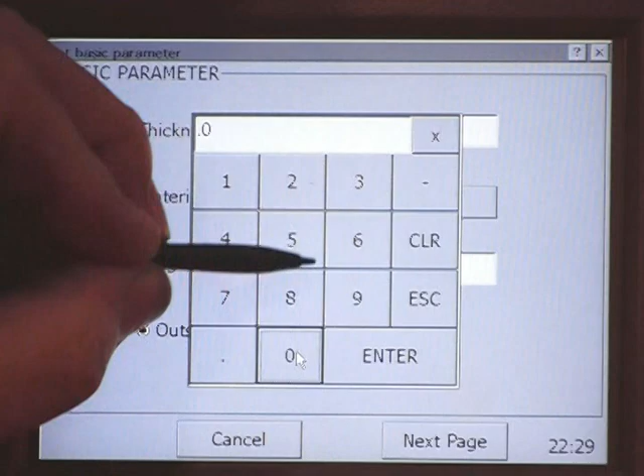Going to be ran. The thickness of the metal, we will punch in .06. Enter. Material type, we will go steel. You have your options of stainless, aluminum, and other, which we covered previous. We'll make it steel. The length of the metal is the amount that will be bent. In this case, 3 inches. So you simply put that in.

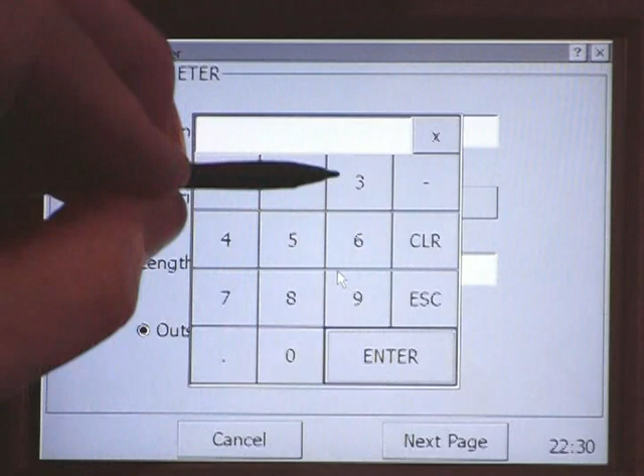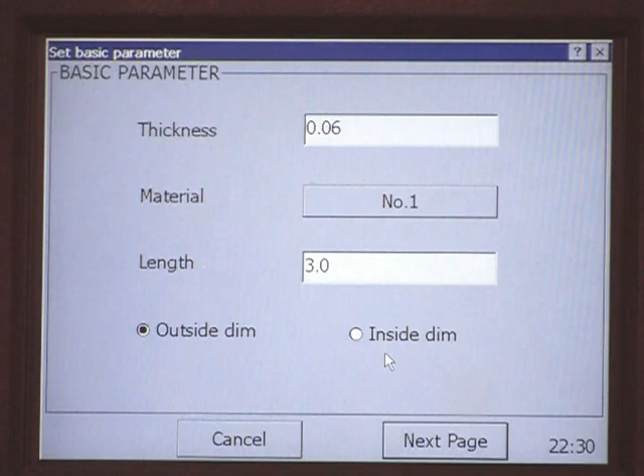Now, it shows outside dimension or inside dimension. That will be determined by your engineers or based on the drawing you're given. To make the product, it should say inside or outside. We will go with outside dimension. Once those have been determined, then you'll go to the next page. At this point, we're going to start our drawing.

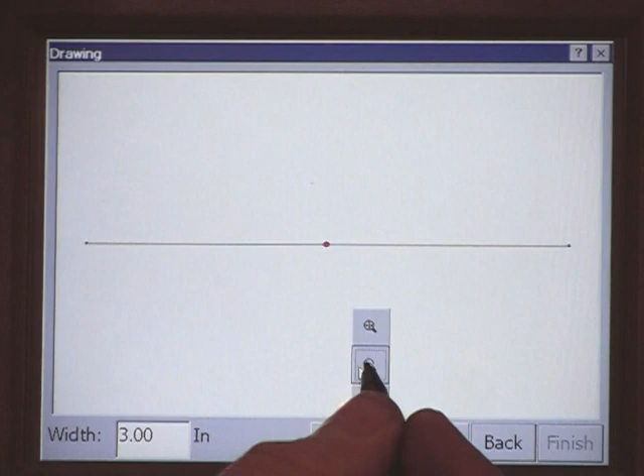The first thing it wants is a width. A width is your back gauge setting. This will be a linear drawing. So you will start from the left and go to the right. In this case, let's make it 3 inches. There's a zoom feature. You can zoom in. If you're doing small, you can go full page. Reduce. What you will do now is you will hit the right arrow.

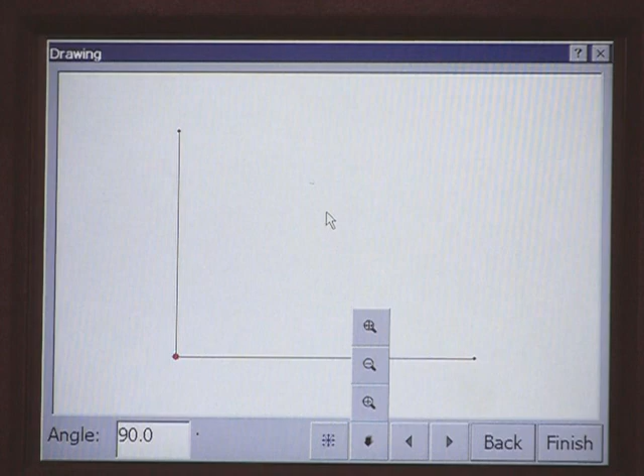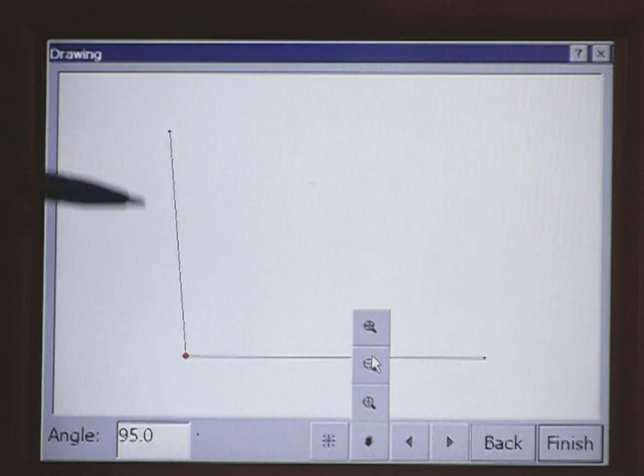At this point, it asks for an angle. If you are going to be doing an angle in increments of 45 degrees, you will select the box there and it will tell you you can select which direction you want it to go. In this case, I want it to go up. If it's not in an increment of 45 degrees, then you will simply put in what angle you want. If you want 95 degrees, you'll put in 95 degrees. And you'll see it's slightly less. What I'm going to do is make it 90 for this purpose.

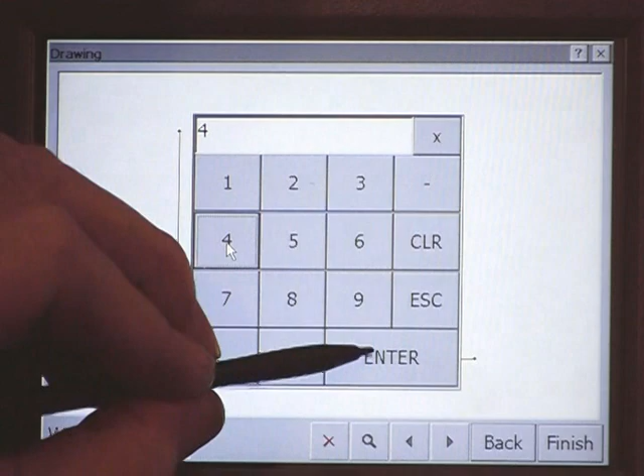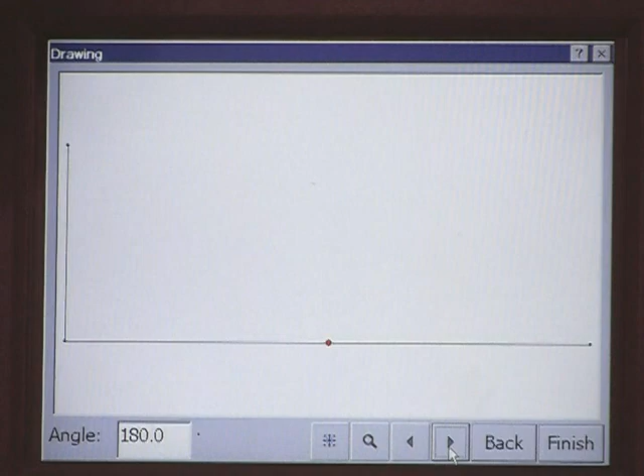You will hit the right arrow or next arrow. It asks for another length. I will put in 4 inches. Now follow the little red ball because that's where it shows the direction in which you're going. Then you'll hit the next arrow and it asks for an angle. I want a 135, or I want it to go down on a 45-degree angle from your baseline here, so I will select there. Now at this point, because the drawing is getting larger, I will decrease it a little.

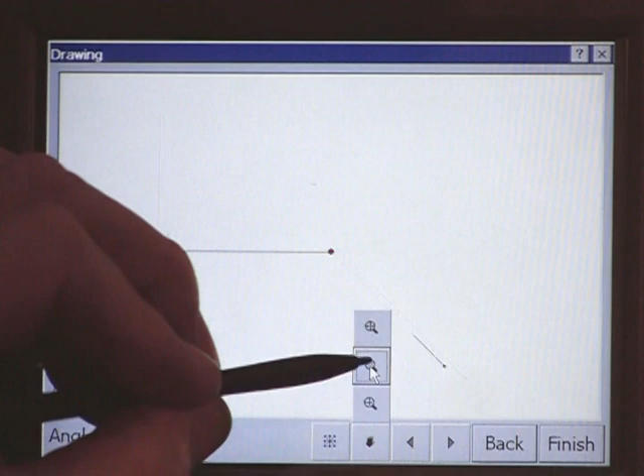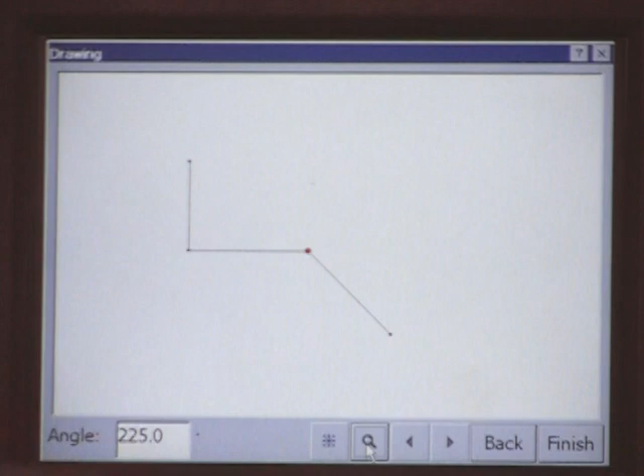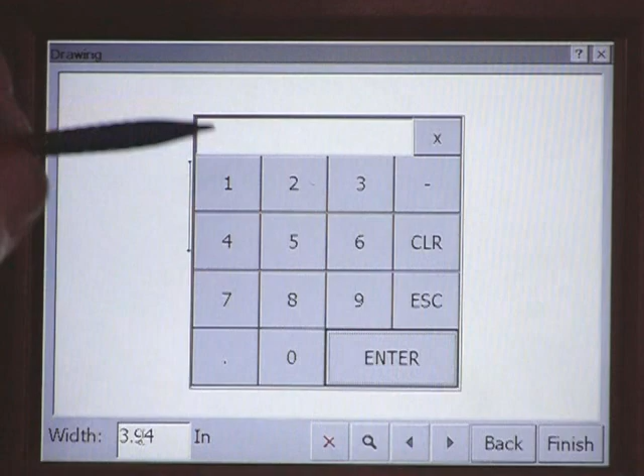Okay? Now, based on coming off of a 0 to 180 degrees, which is flat, this angle actually is 225 instead of 135 degrees. But as long as your drawing is reflecting the drawing that you have in your hand, that's what you're hunting for. You'll hit next. You'll put in the width again. We'll make this one 5 inches. Next, because I'm going to be taking it up, I'll select this arrow again. Okay, then you'll hit next.

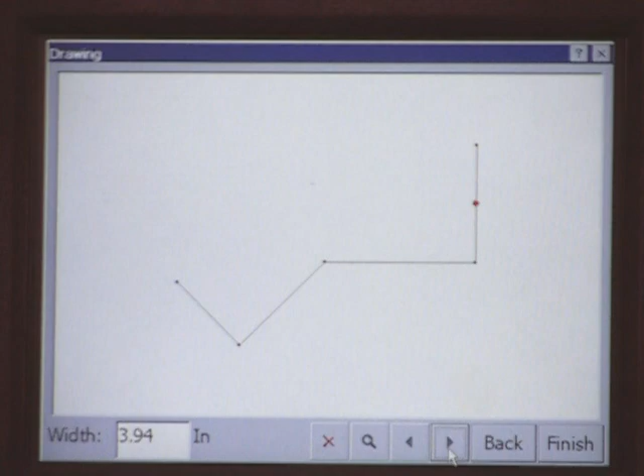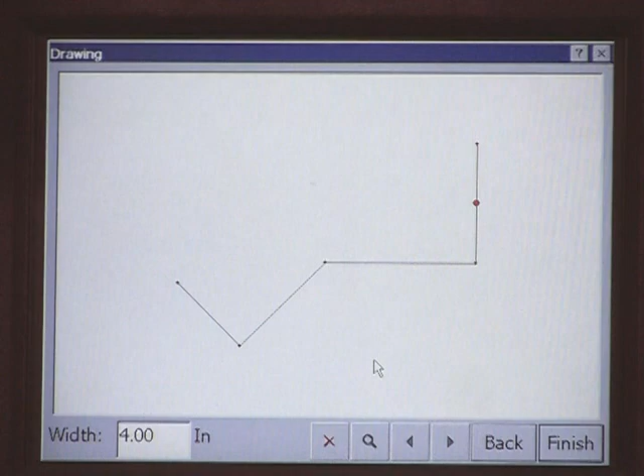The first thing that you will enter in a drawing is a measurement, and the last thing you'll put into a drawing is a measurement. At this point, I'll make the last one 4 inches. Once this is drawn and it looks exactly like the drawing you've been handed, you can hit finish. But I'd like to demonstrate other functions here, if I might.

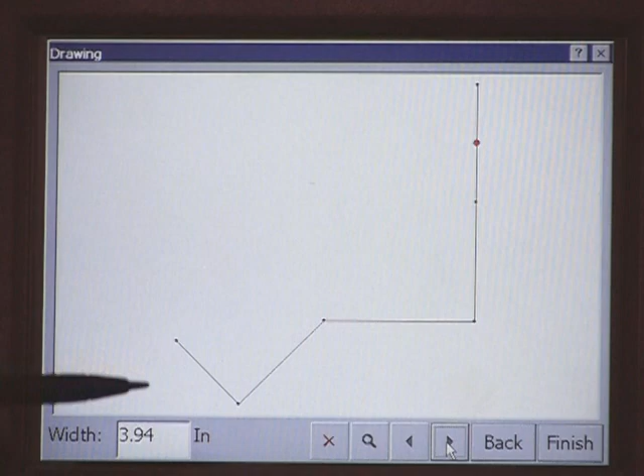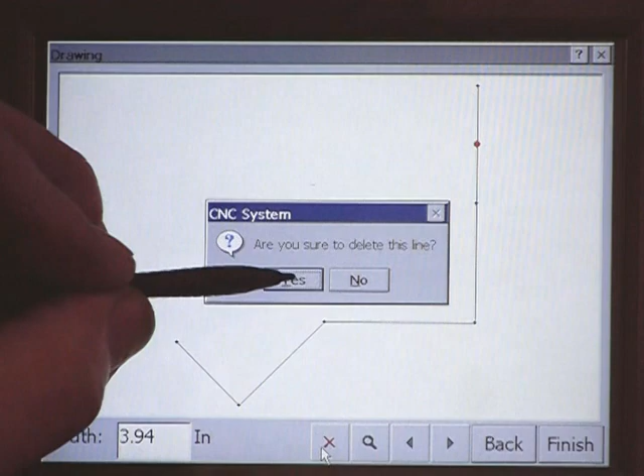Let's say that you go to this point and you've added another line. It's asking for an angle. Leave the angle where it's at. You'll go to next. Once it goes to width, you'll see a little red X. You'll touch that X and it asks, are you sure you want to delete this line? You'll say yes. You've deleted that line. At this point, you will hit finish.

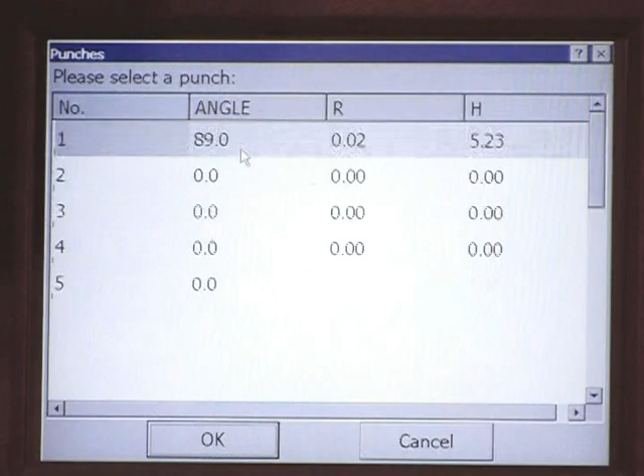And it's asking for further basic parameters. You will select your punch, highlight it in blue. You will select your die, highlight it in blue. Information A, C, E, and D, you'll see are whited out. Those areas are there so that you can change given information on whatever punch you're utilizing. The machine needs to know if your punch is different than what comes with the machine so that it can determine whether or not there will be an interference bend.

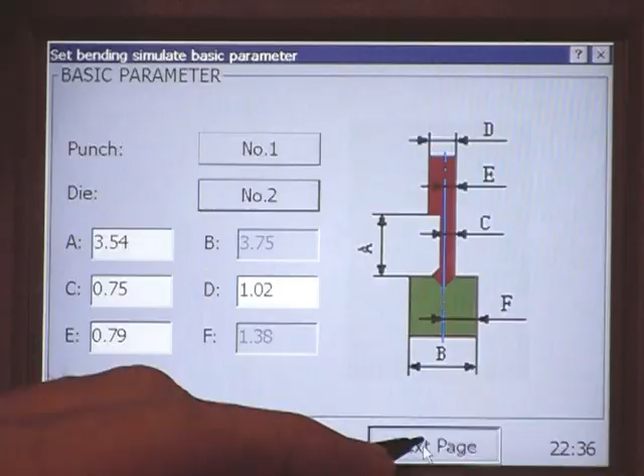So if you put a punch in other than what comes with the machine, these parameters should be measured and entered into the program at this time. These parameters are not asked for in your punch library. This is to augment your punch library for use of a punch only in the auto run mode. You will hit next page. At this point, we're going to simulate the bend. You will go through and you'll hit bend. There's step 2, bend, and step 3.

Now, go to your function keys, and what you can do at this point, let's go back to step 1. We're going to hit unbend, unbend. At this point, if you use the swap key, if you follow the little red ball where you started your drawing, when you hit swap, you'll notice the little red ball came out the other direction. The computer did a sort, and that's how it's decided it wants to bend this material for you in the shortest amount of time.

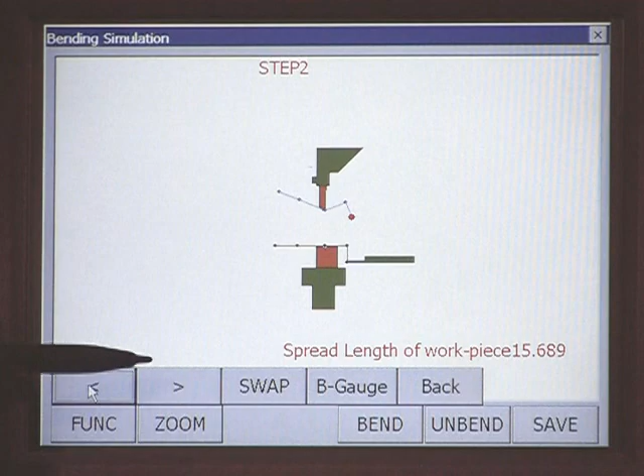Now, on the first and the last step, all you can do is swap those two. But any bends in between, let's go to step 2. The machine's showing a 90-degree bend. Let's say that you want the 135 bend first. What you will do is you will move the positioning around with your arrows. Now you'll notice that step 2 is actually 135 degrees.

Myself, I would rather stay with what the computer, in this case, has chosen, so I'm going to swap it back. That's what those keys are for. Now, I'm going to bend the next step. At this point, you will notice that your back gauges drop down to meet the tip.

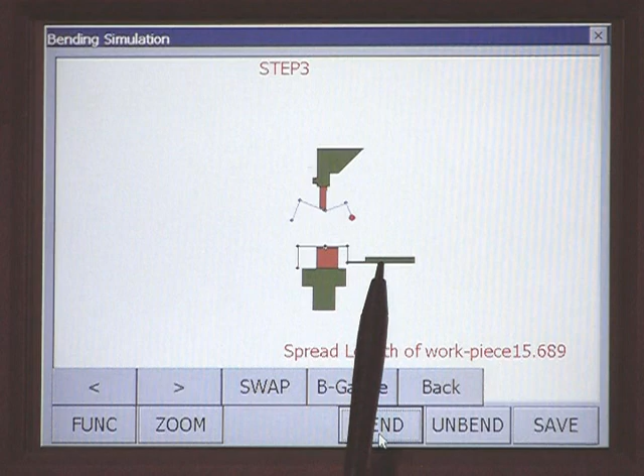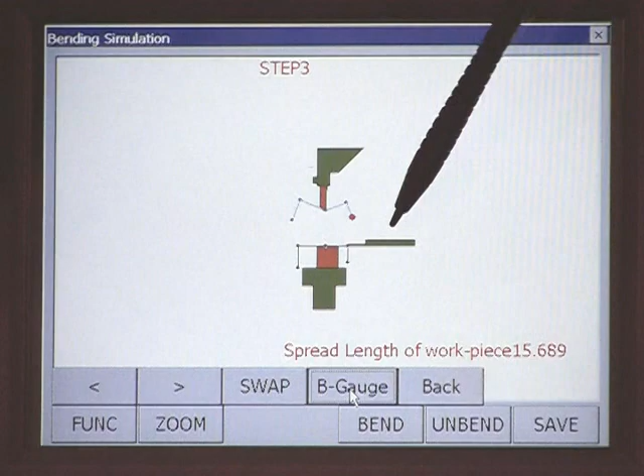On some machines that do not have the R-axis, this cannot be achieved. And also, your R-axis may not have enough travel to achieve the length which is needed to accommodate. So what you would do is touch back gauge, and you will notice now that the back gauges come up here. This will automatically activate the automatic retract feature in auto run.

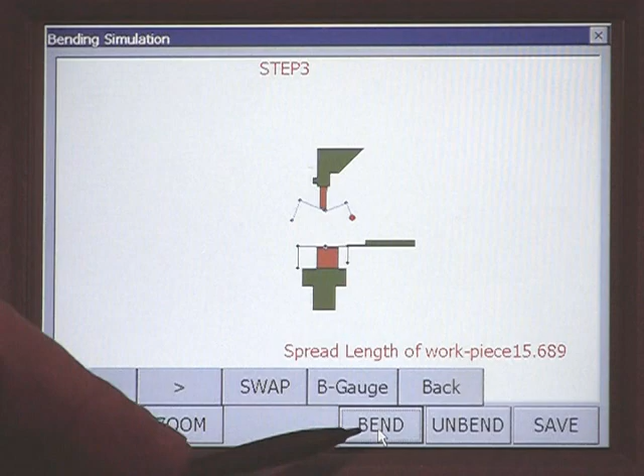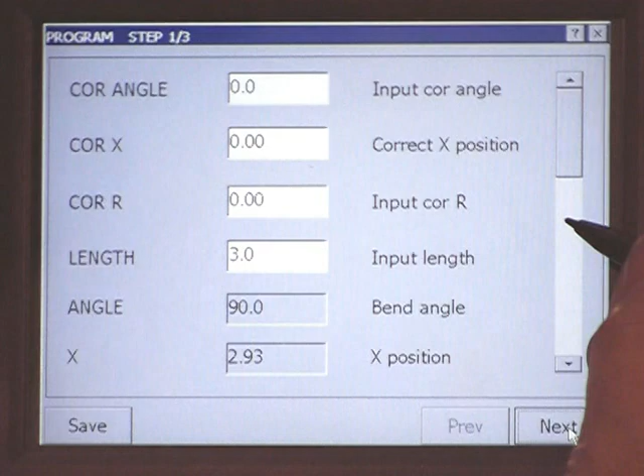At this point, once you've established this is exactly like you want it to bend, you will go back through. Ensure that everything is exactly like you want it. And then you will hit save. Now, it goes into a code program so that you can go through. You'll see we're on step 1 of 3 steps, and you've got 3 different pages on each step.

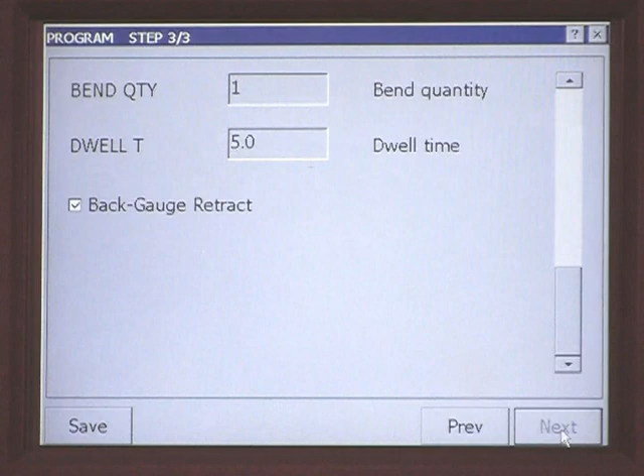You can review this information to ensure that your drawing and the code reflects exactly what you want your product to be. So then you'll go next step, review step number 2, go to step 3. You will see that the computer automatically selected the back gauge retract because you selected it in your simulation. You will go through and review that information. If all that information is proper, then you will save to the computer.

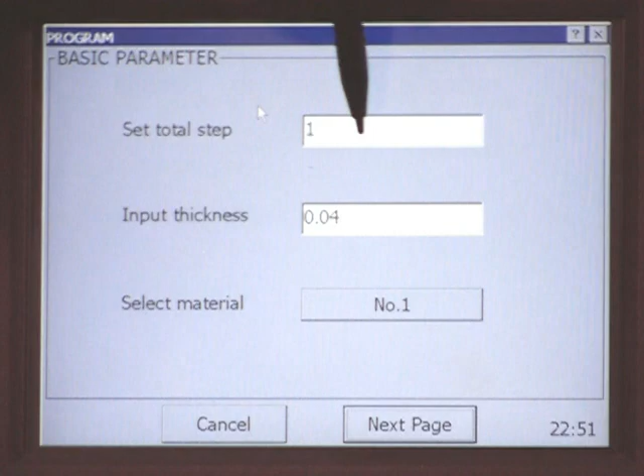Now we're going to do a code program. What you will do is you will go to Product. Now, at Product, as mentioned before, you can either create a new program or edit an existing program. In this case, we'll create one. What you will do is go to New. You will go to Code. You will tell the computer how many steps you want. In this case, we're going to use 3 different steps. You will select 3, enter.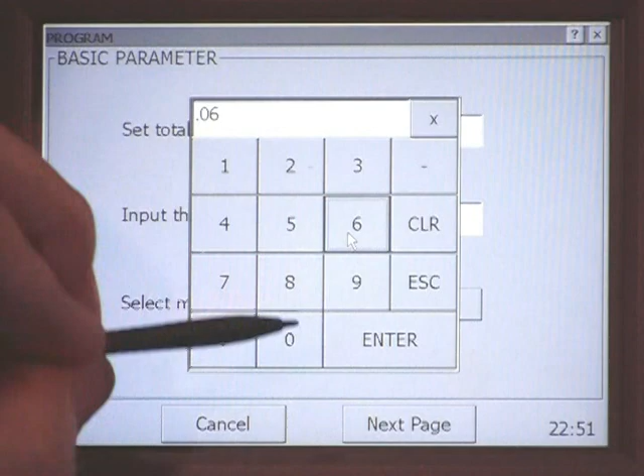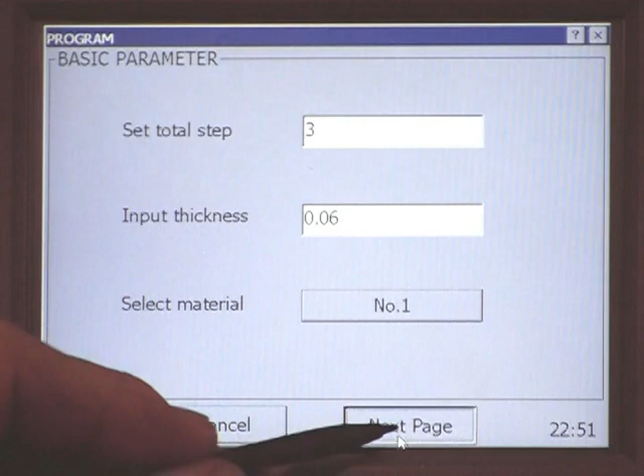The thickness of the metal, we'll use 0.06, enter. The material type, we will be utilizing steel, okay. You will go to the next page. Once you get to this page, your step 1 of 3, you will simply fill in the information according to what you want to bend. My first angle will be 90. The correct angle you will not put here. You will do any corrections in the auto run mode and it will be saved to your program.

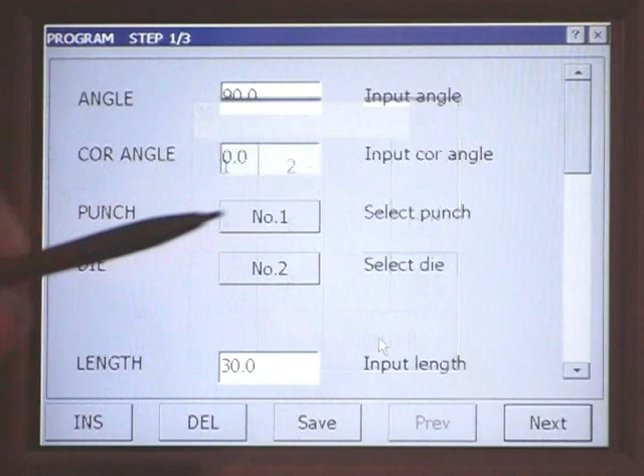You want to keep your program virgin. In other words, keep your 90 at 90. You do not want to change your angle. You want to keep it at 90. You will select the right punch and die. Proper length, in this case, we'll say 30 inches. At this point, you will go to the next page. You will establish your x-axis or your back gauge. We will put 3 inches.

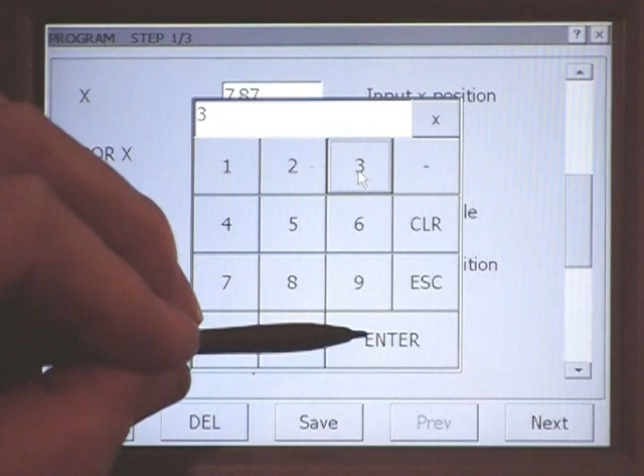Your correct x will also be changed in the auto run mode. Your x angle is your x apostrophe. This machine does not come with that, but if there was an x apostrophe, you could put what degree of angle you wanted at this time. R axis, if you want your back gauge up or down, you would at this point put that in. Your correct R would also be performed in the auto run.

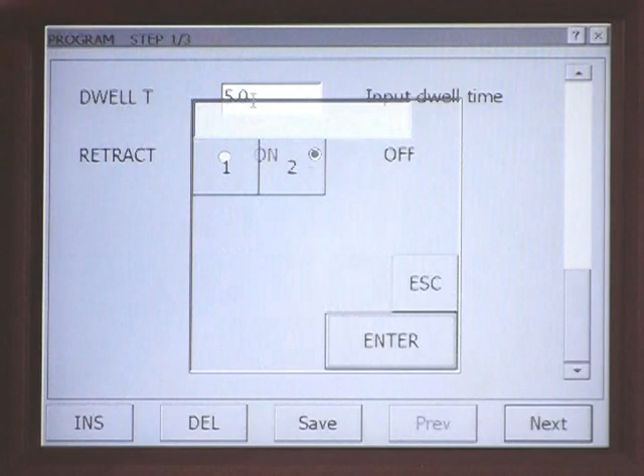Side up or down. This is simply to tell the operator if they need to flip the metal. In this case, we're going to leave it in the up position. Next page, we want to put in dwell time. We'll change that from the default of 5 seconds to 4 seconds. That comes into play when you're utilizing your dwell time or your auto return mode. At this point, we will go to the next step. Come back up to the top.

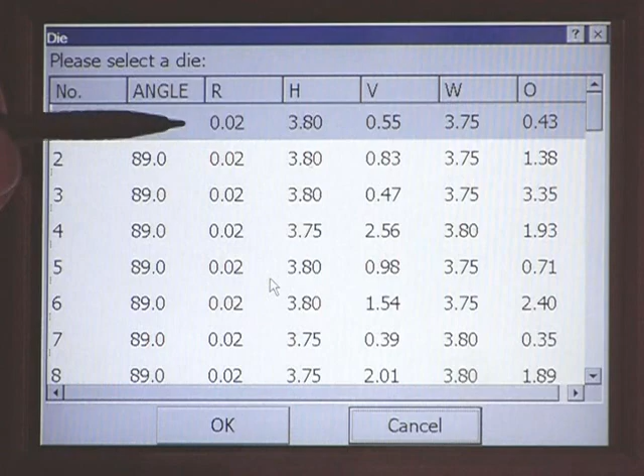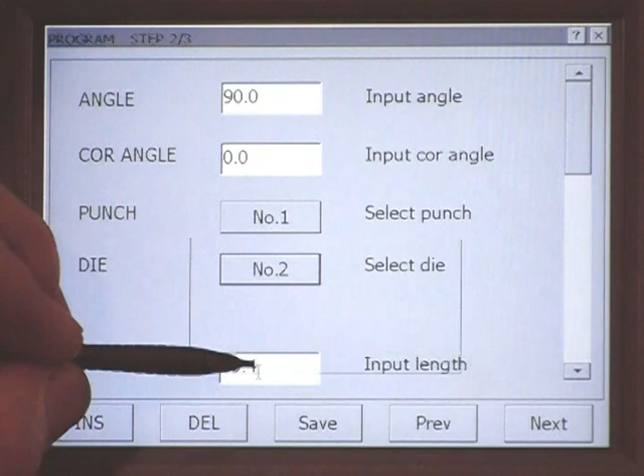The next bend we're going to do will be a 90 also. You will select your punch and your die. In this case, we've got 1 punch, so it's going to be punch 1, but in your application, you may have a variety of punches. You will have to select the correct punch. We are on die number 2. You'll hit OK. The length again, we'll put in at 30 inches. Come down to the next page. I went 1 too far. And we'll put in 5 for the back gauge.

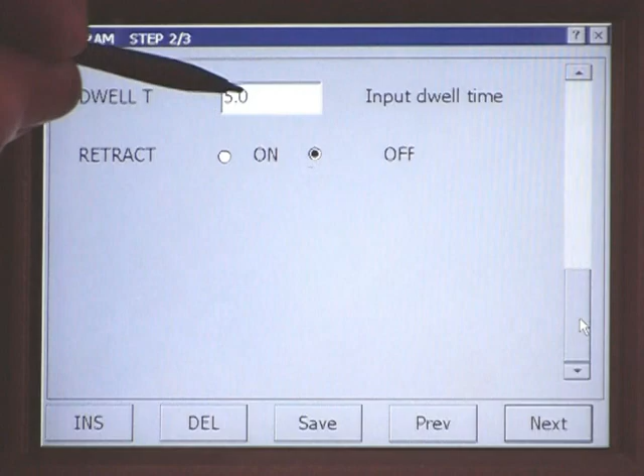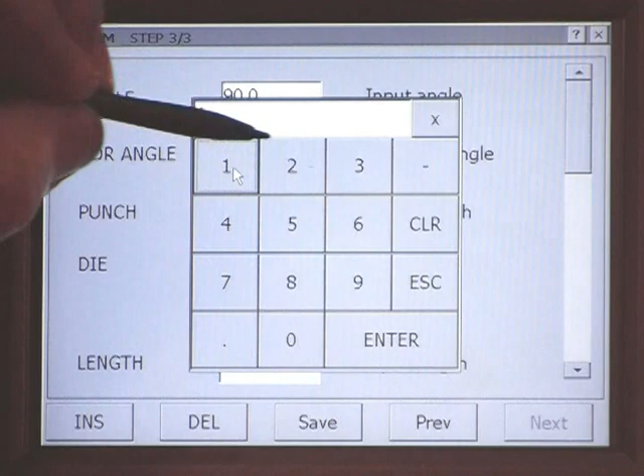Side will also be up on that. Come down to the last page. We'll change dwell time to 4 seconds. Go back up to the top. Go to the next step, and final step, step 3. My third step is going to be 135 degrees, which will give us a 45-degree bend up. You're working off 0 to 180 degrees.

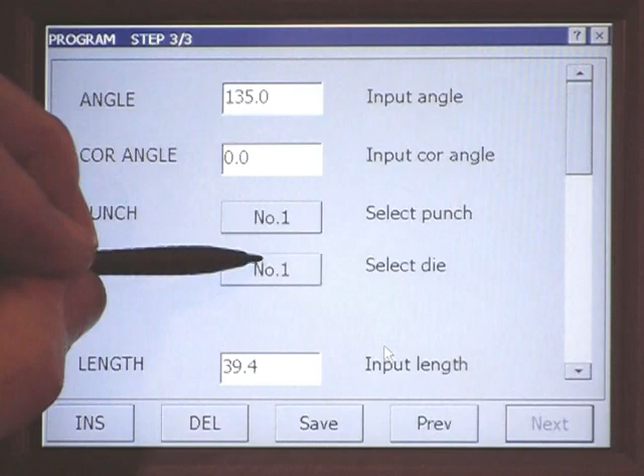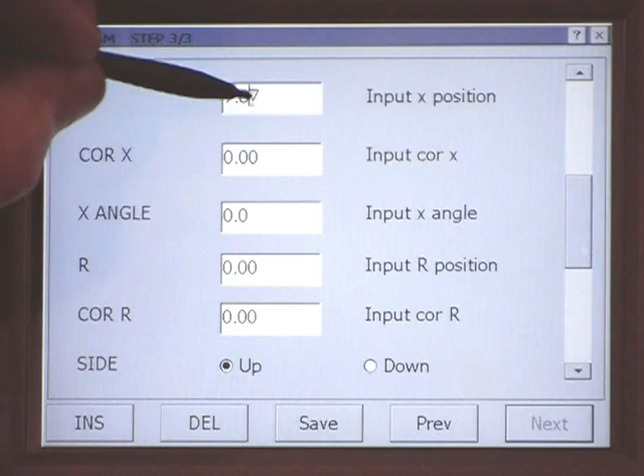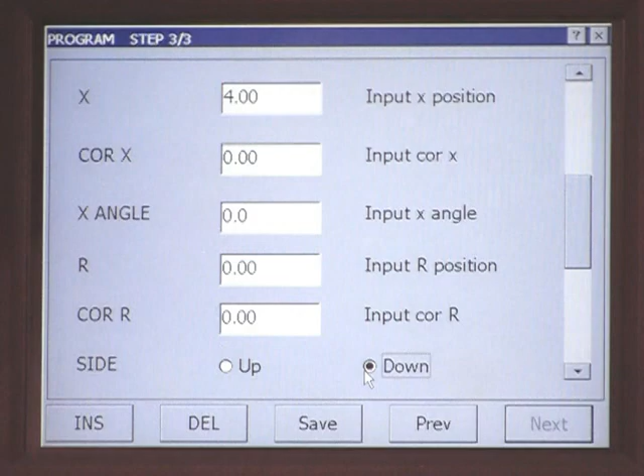Punch, die, length 39.4 inches, page down. We will put 4 inches on your back gauge. Now here, because I flipped the metal, you'll want to show side down. The operator needs to know whether they need to flip the metal or not. Change the dwell time, 4 seconds.